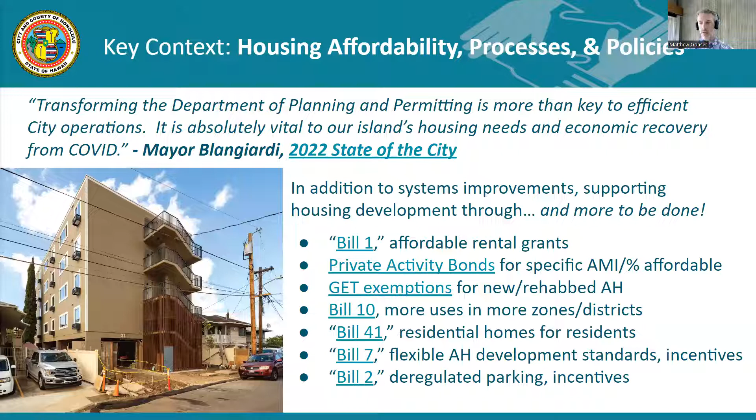We know that there's more that needs to be done, and how can something like the Energy Conservation Code fit into this developing picture and strategy for affordable housing development? We also know that conditions continue to get more and more difficult for development and construction over the past several years — obviously, wildly volatile material costs.

Recently, interest rates are creeping back up, which challenges the ability to get into a unit. We know supply chain has been a real challenge, but also on the construction side itself, electricity and fuel costs complicate crews, also challenges on labor and skilled folks to actually build the things we know are critical.

And all of this is operating at the same time here on Oahu, as we're coming towards the closure of our only coal power plant in September, while knowing that we need to bring more grid scale projects online, but also facilitate more direct power generation right above our heads, whether residential or commercial structure.

Really the backdrop and the reason people voted for this office is that climate change continues to impact our local economy and our people and place, and it is accelerating in terms of different changes. We'll be talking about one of those climate change impacts, heat specifically, as we progress.

The city, through both the administration and city council, last summer adopted our first ever climate action plan. There was a specific action in there keying in on the importance of codes, which really helps set the standard for new and future development.

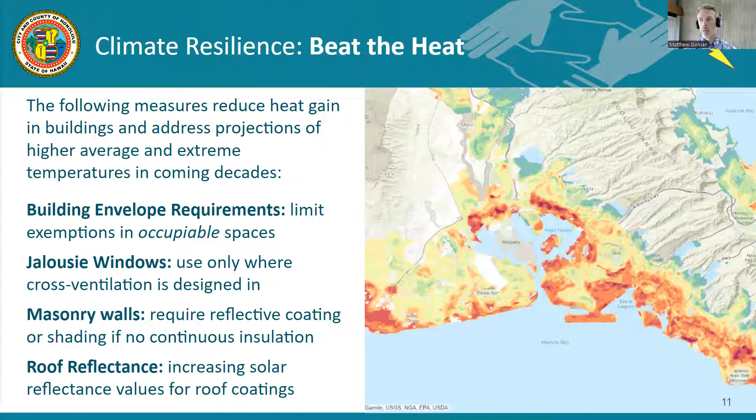So with that, I'm going to hand it over to my colleague, Alex Yee, to provide us a little more insight into what we've already experienced here locally in terms of increasing temperatures, and some of the things we know are over the horizon, and that we want to ensure we are thinking about public health and safety through codes and through new construction.

Alex? Thanks, Matt. Hi, everyone. My name is Alex Yee. I also work for the Office of Climate Change, Sustainability, and Resiliency as the Coastal and Water Program Manager. In that capacity, one of the things I've been looking at is trying to get a better sense of what climate change is going to look like specifically here on Oahu.

What are the impacts and hazards that residents on Oahu are likely to face?

I wanted to share a little bit about some temperature projections, because I think it's critical as we think about potential changes—whether that's how we build, code, regulations, or incentives—to understand those potential changes in the context of the hazards and the amount of climate impacts that are probable to occur here.

So I've put on this slide a projection of increases in temperature for the state of Hawaii, including historical and future forecasted projections based on emission scenarios. I've overlaid the average typical lifespan of a single family home if constructed in 2020, about 70 years, to understand how much hazard we're talking about over the lifespan of houses built today. You can see a projected increase from 2.7 to 4.5 degrees by mid-century, and towards the end of the structure's life in the 2090s, we're looking at up to 9.3 degrees of increase.

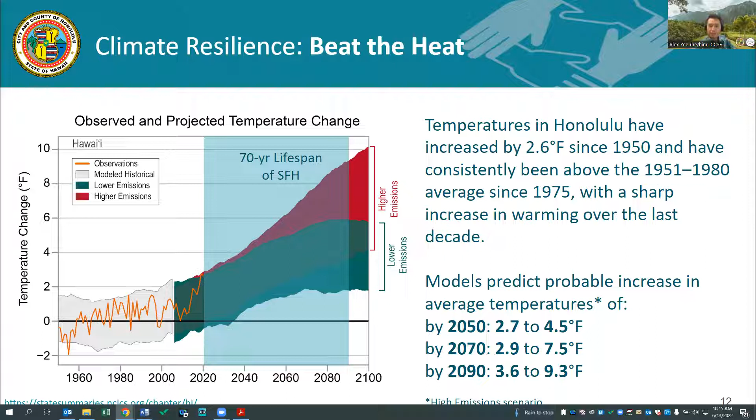To put it in the context of how it impacts residents, heat is actually the number one weather-related cause of death in the United States. It affects so many people because you really have to be built to withstand it. If you're not, it has a disproportionate impact on the elderly, young people, and people with existing medical conditions.

I've put up a map here—it's a section of a heat map of actuals recorded on Oahu in 2019, the hottest day of the hottest year on record. These are heat indices, a combination of temperature and humidity, which better represents the human response to heat and humidity. As you can see, these high heat indices have real human health implications. This is really a public safety and public health issue.

So when it comes to looking at these increases in heat, there is a lot at stake for Hawaiʻi residents.

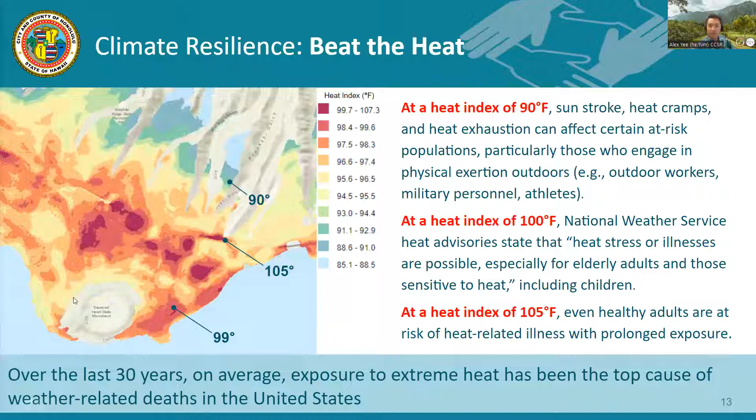With that, I'm going to turn it back over to Ben to talk more about building envelope requirements. Thanks, Alex, and thanks, Matt, for getting us started.

So we're going to dive into four separate measures that address this idea of increasing heat in the code. What they're trying to do is raise the floor on the code so that, although most contractors and developers already consider these items, we feel there should be code in position to ensure they're taken care of because of the liabilities associated with increasing heat.

The first measure is really about the language and nuance of the code, having to do with the idea of unconditioned spaces versus conditioned spaces and low energy buildings. In both the residential and commercial portions of the code, there are exemptions from envelope requirements for low energy buildings, and the way those are defined is by the term conditioned spaces.

While that works in temperate climates—because you're really not going to occupy a space much in a northern climate, which is evidence that space likely doesn't need to be insulated, whether it's a shed or a garage—in Hawaii it's a lot harder to define it that way, because plenty of spaces can be built without conditioning. So you end up in a position where the occupant years later may be in a difficult position to provide cooling. This language is really just cleanup, switching the word 'conditioned' to 'occupiable,' which assures that the energy code will be followed with regards to the envelope requirements.

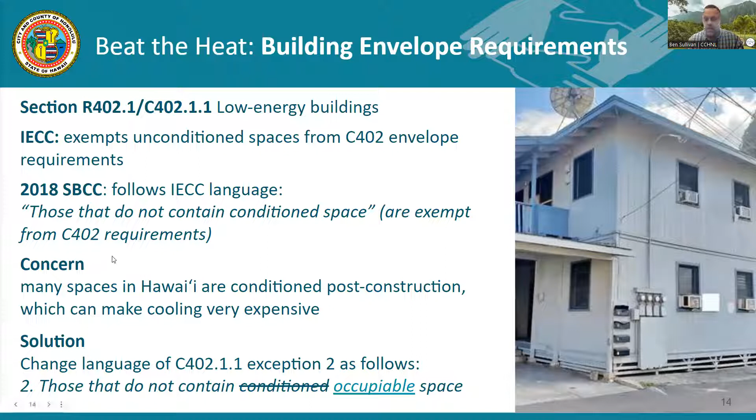So similar to the last provision, but a little more nuanced, this is about the use of jalousies and jalousie windows with regards to the building code. The use of jalousies has to do with something that is really common in Hawaii, and it has a long history. And where you have the opportunity for cross ventilation, it makes a lot of sense.

But there's a considerable amount of compromise with the use of jalousies in that when you're in a space that is going to be mechanically conditioned, air conditioned, it's really difficult to hold that cooling in with jalousies. So yes, you do get a lot of potential benefit from cross ventilation, but then you also get some negative impacts from when you do need to air condition.

And so this measure is not saying that we cannot use jalousies. This measure is just saying what we don't want to do is use jalousies in a case where there is absolutely no opportunity for cross ventilation. And so really their negative impacts outweigh their positive impacts.

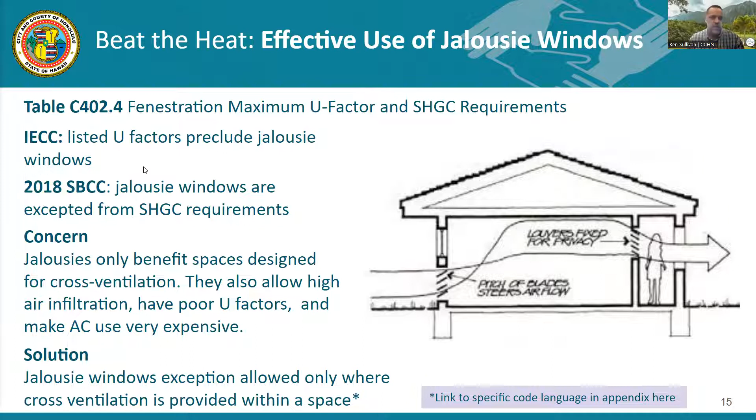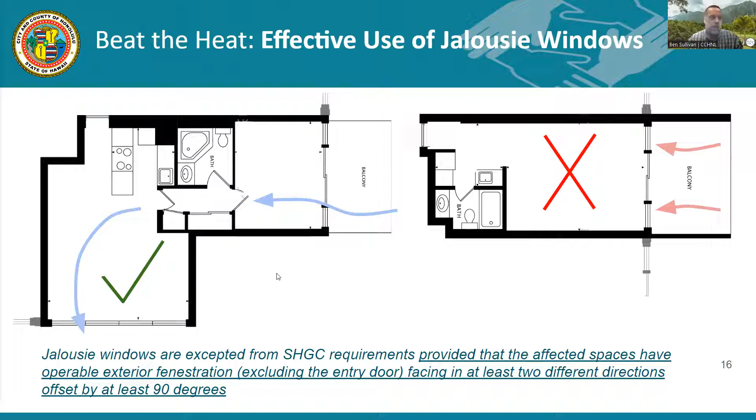So next slide. This slide is an important conversation. And really what we're talking about here is solar heat gain.

So with masonry walls, I think we all know that masonry is a great material to be used in Hawaii for a lot of reasons. It's very durable, very resistant to high winds and storm conditions, and lasts a long time. It's got a real history in Hawaii of being a successful building material.

And in fact, because of Hawaii's modest swings between daytime and nighttime temperatures, there's also not a need to have continuous insulation with masonry, because if you're talking about an indoor and outdoor temperature that are only 10 or 15 degrees different, and a daytime and nighttime temperature that are not very different, there's very little heat transfer that occurs through conduction along that masonry wall. So it's safe to say, hey, we don't need that continuous insulation.

However, especially with east and west facing walls, we see the condition occur fairly frequently where you have a masonry wall that can absorb a tremendous amount of solar radiation in the form of shortwave radiation that will really heat up a masonry wall and basically turn it into a radiator inside of a space. That is something that can be prevented through either the use of reflective surfaces or shading.

So a projection factor of greater than 0.3 in this case is what the language is. What we're proposing here is to eliminate an exemption in the state code that exempts masonry walls from either the first or the second of these requirements. And that's, again, to avoid that heat that we know is going to just only get worse.

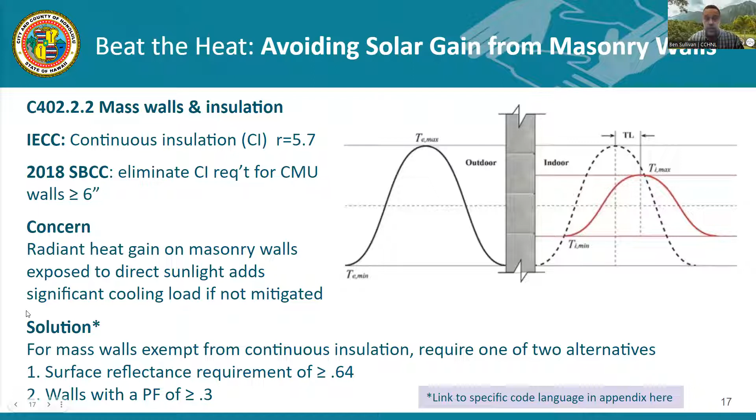So if we could go to the next slide. I'm going to pass it to my good friend Howard, and I just want to thank Howard for being here. Howard has been doing this work more than most of us can even claim to remember, and has a wealth of knowledge. So Howard, thank you.

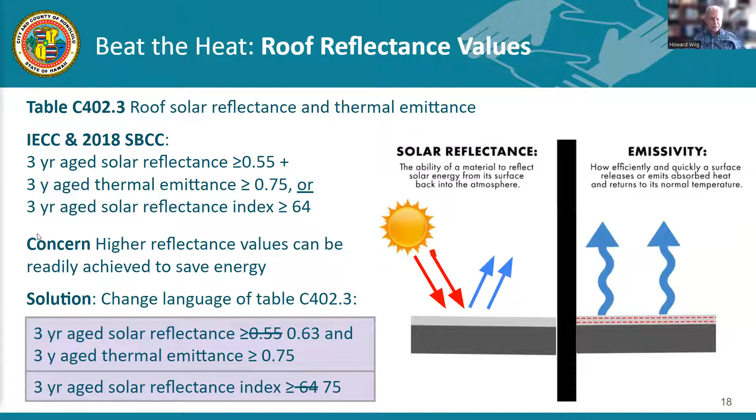Howard, this is you as well. So this is me as well. I never would have guessed that.

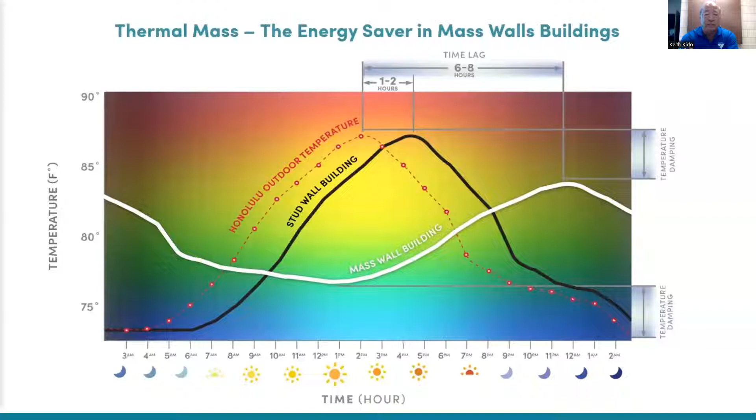Also, aside from the additional costs for new construction, the architectural and design costs will go up too, because especially in commercial and low-rise residential buildings, architects try to design a lot of things around that. If you can bring up the next slide, as you can see, the ASHRAE code...

ASHRAE takes into account the thermal mass walls in its natural state, so it'll make it much easier for architects to bypass having to hire consultants for special buildings to get through code compliance.

And that's why we wanted to simplify the code back in 2015, to make it simple for design people so they can design a friendly and pleasant environment around buildings without having to worry about using specified materials to meet the energy code requirements. Okay, that's all I got.

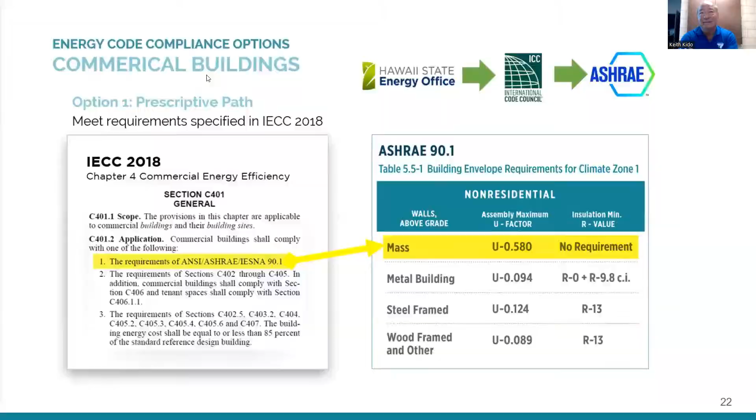Hi everyone, my name is Juan Tran from Hawaiʻi Energy. I'm one of the energy advisors here. Just to give you a quick overview of our program, Hawaiʻi Energy's mission is to empower island families and businesses to make smart energy choices, save money, and pursue a 100% clean energy future.

Hawaiʻi Energy has three areas of focus. One is clean energy technologies, all the equipment you install. Another is accessibility and affordability, also known as A&A, which includes small business owners, nonprofit organizations, and low-income residents. And we also have market transformation, also known as workshops and education.

For clean energy technologies, our program encourages customers to install clean energy technologies through incentives and grants. For our A&A program, we have a team to ensure all residents and businesses understand our program and can participate. And transformational means Hawaiʻi Energy coordinates professional development workshops and trainings across the island, especially for code training.

So who can participate in our program? Anyone that has a commercial or residential account on the islands of Hawaii, Lanai, Maui, Molokai, and Oahu. Kauai has its own co-op, so they don't participate in our program.

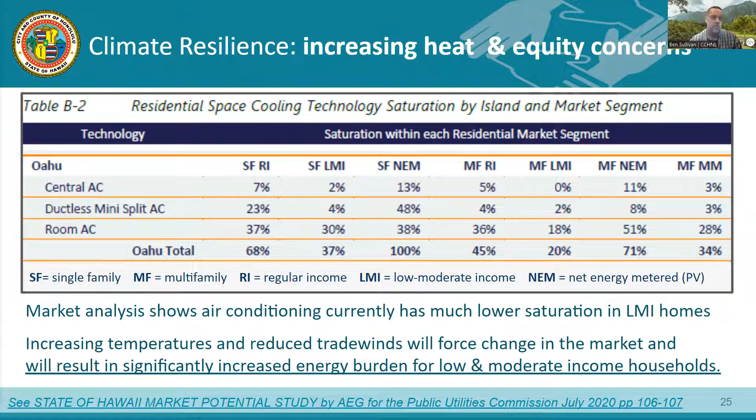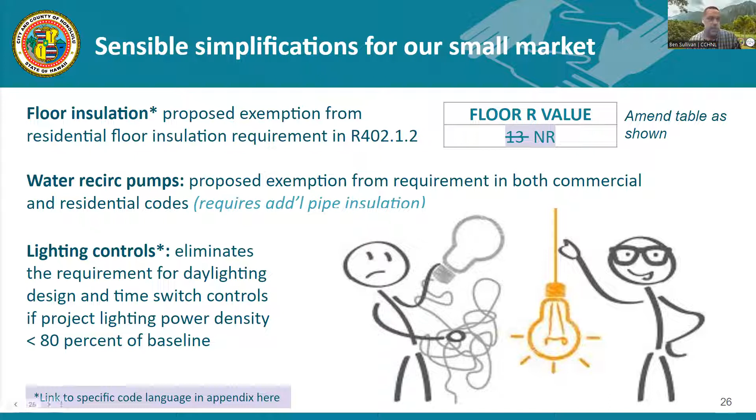So amendments that really make a lot of sense. I think that concludes the content side. Alex, go to the next slide - yes, so this is an important conversation.

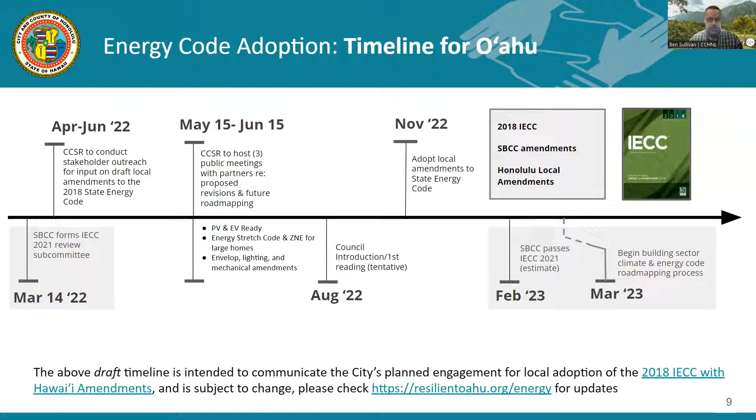And then I will pass to Howard in terms of talking about the next code cycle. The way the code adoption process works: federal law requires that building codes, not just energy codes, all building codes, be updated every 3 years. The reason for that is technology is improving so rapidly that we can build better, safer, more comfortable homes and buildings using better and better technology. So we meet every 3 years at the national level, reach consensus on which new proposals will come to the fore, and those are transferred to the state energy offices. Every state has an energy office. In the case of Hawaii, the Hawaii Building Code Council debates any amendments to the national code and adopts at the state level. Then the counties are the people who enforce the codes and do the inspections.

The counties have, after that, 2 years to adopt a new code with their own amendments. This applies not just to the energy code, but to all codes. We're looking at the 2018 code, with all counties adopting by December 14th of this year, which is right about the same time the state energy office will be formulating proposals for the 2021 IECC. Maybe we can adopt that by December also, so the counties have an additional 2 years to adopt the 2021. Just to reassure everybody, there's no radical changes planned for 2021, just moving towards zero net energy, and we're doing a pretty good job of that already.